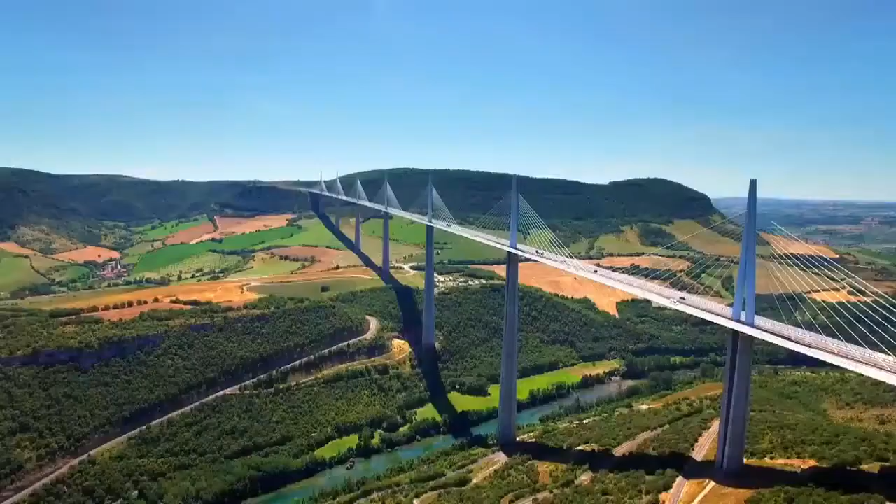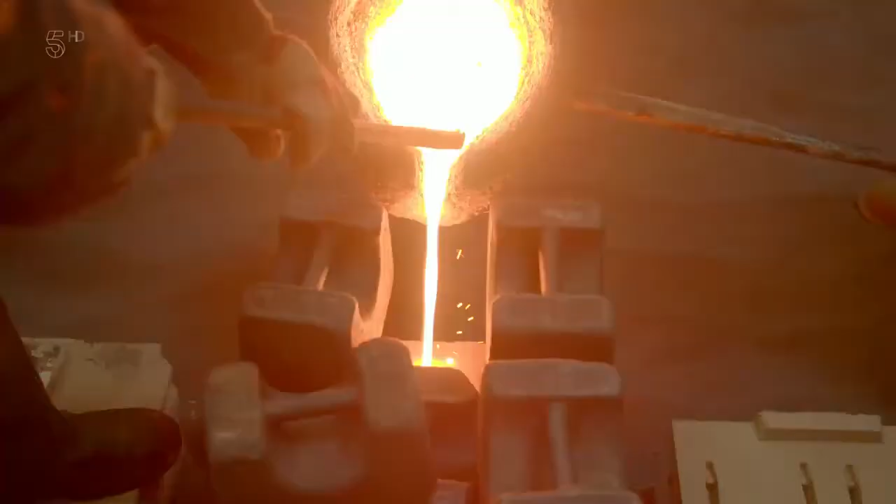Majestic, dramatic, awe-inspiring. These are the bridges that are worldwide icons, as well as engineering marvels. Each of them broke new ground - the first, the biggest, the longest, and the tallest. I'm Rob Bell, an engineer, and I'm on a global adventure to discover how and why these magnificent structures were built, and to learn about the sweat and the sacrifice that went into their construction.

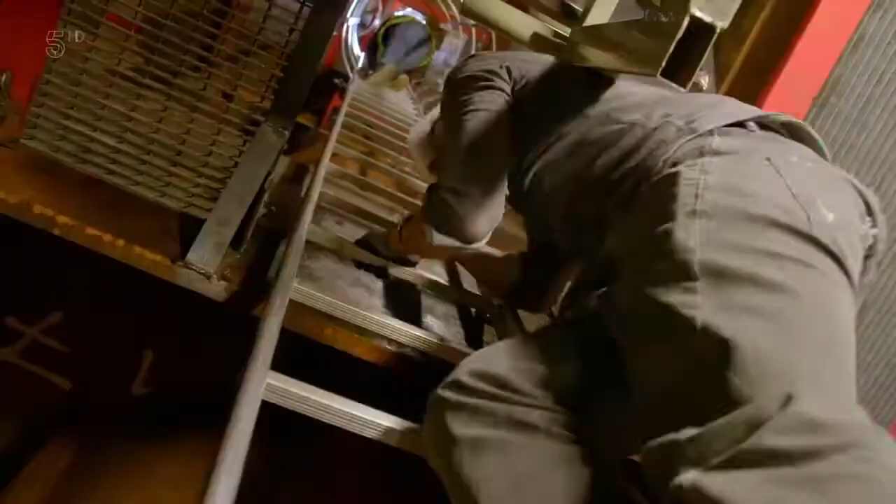I'm going to take you closer than ever before, inspect them from every conceivable angle, and meet the men and women who keep them working round the clock, no matter what. These are the world's greatest bridges.

Sydney, Australia's oldest and largest city, and one of the world's most beautiful waterfronts. It's known as the Harbour City, and the very best way to arrive here has to be by boat, just as the first European settlers did some 230 years ago. Sail into the harbour and you'll pass two world-renowned structures, the Sydney Opera House and the Sydney Harbour Bridge.

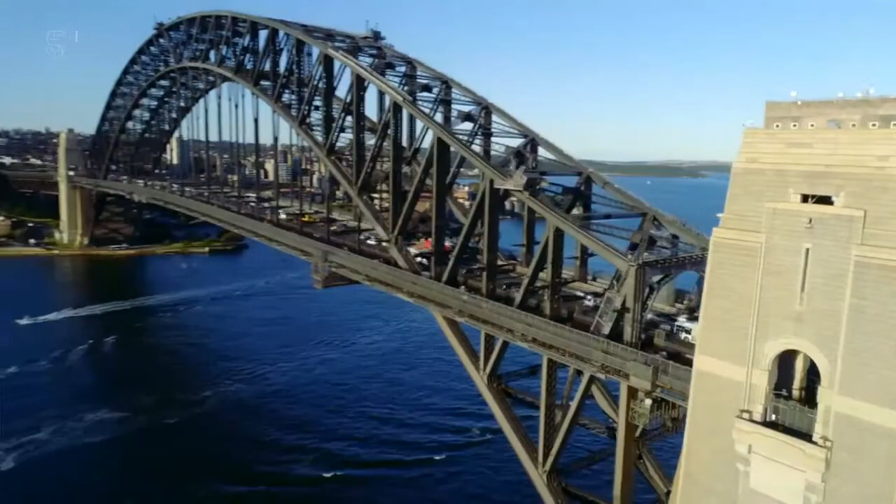Rising to a height of 440 feet, it's the world's tallest steel arch bridge, connecting the northern suburbs of Sydney with the city centre. It weighs more than 39,000 tonnes, spans 1,650 feet and is 160 feet wide. It carries 8 lanes of traffic, 2 railway lines, a footpath and a dedicated cycle path. Every day, more than 200,000 cars travel across it.

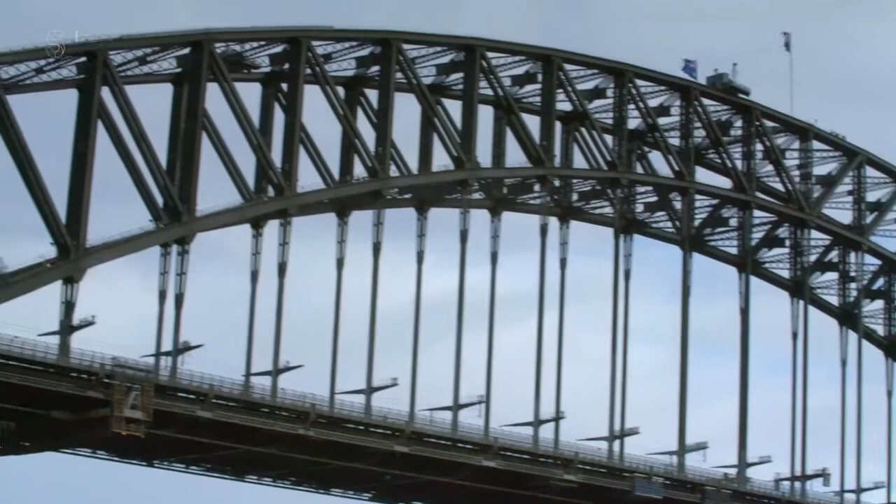When it opened on the 19th of March 1932, it instantly became a world-renowned landmark. And since then, millions have passed across it, over it, and under it. Like a giant, triumphant gateway, it signals your arrival here into Australia. The bridge had taken a century from first proposal to completion. The construction itself lasted 8 years and cost £6 million. And its arrival marked a new stage in this young city's remarkable evolution.

Sydney was founded in 1788 when 11 British ships landed, right about here. On board were more than 1,000 settlers, including some 850 convicts. The captain described this as, without exception, the finest harbour in the world. And he named it Port Jackson.

Within 4 years of the first shipload, another 4,000 convicts arrived. They were followed by the first free settlers from Britain, who travelled here to make a new life. By 1871, 200,000 people called it home.

As the south side of the harbour became crowded, some began settling directly opposite. The North Shore's so close, look - you could swim to it. Yet to get there by land, you'd have to travel a good 15 miles all the way round. And in the 19th century, that journey would have taken about a day. The alternative was a ferry.

The first service was started in 1816 by an enterprising ex-convict from Jamaica. Billy Blue, as he was known, plied his trade wearing an old naval officer's coat. Demand was such that he soon had a fleet of 11 boats.

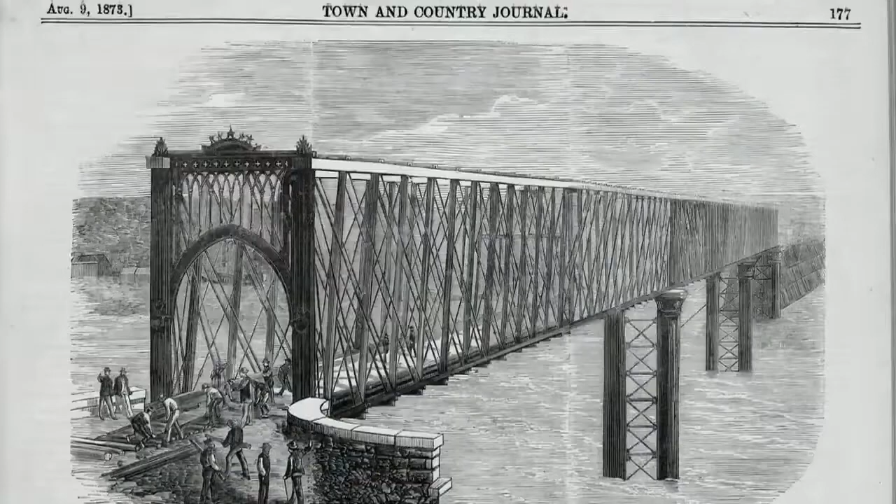In fact, this wasn't a new idea. Throughout the 19th century, various bridge proposals had been submitted, but had all been rejected by successive governments. The designs were considered too fantastical, too unsightly, too much of a risk to shipping, or simply too expensive. But by 1900, a solution was needed urgently. So the government launched a worldwide competition to find the best design and construction plan.

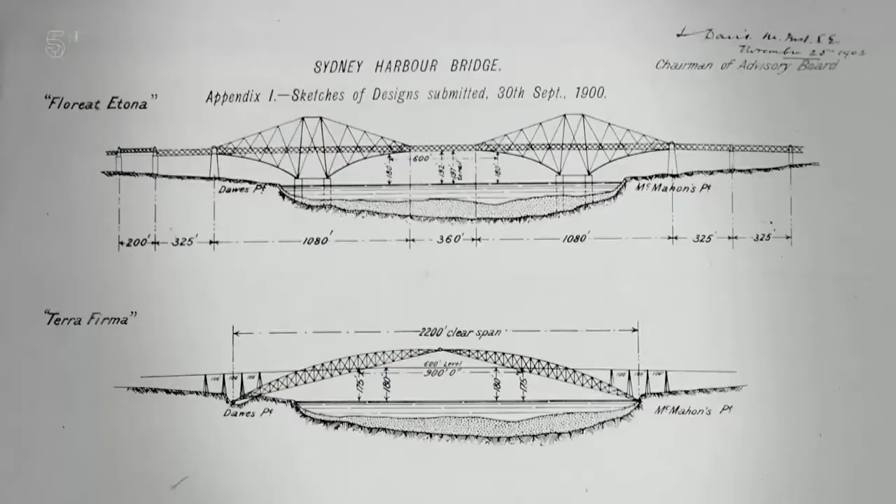30 of the top entries were put on public display here at the Queen Victoria Building, once a market, but now a smart and chic mall. But the judges deemed them all to be unsatisfactory and too lacking in detail. The only answer? A second competition, this time with a much more detailed brief.

The bridge had to allow a clearance of 170 feet above the water. The main span needed to be 1,192 feet long, and the deck a minimum of 60 feet wide. It also needed to accommodate 2 railways, 2 roadways, 2 tram tracks, and 2 footpaths.

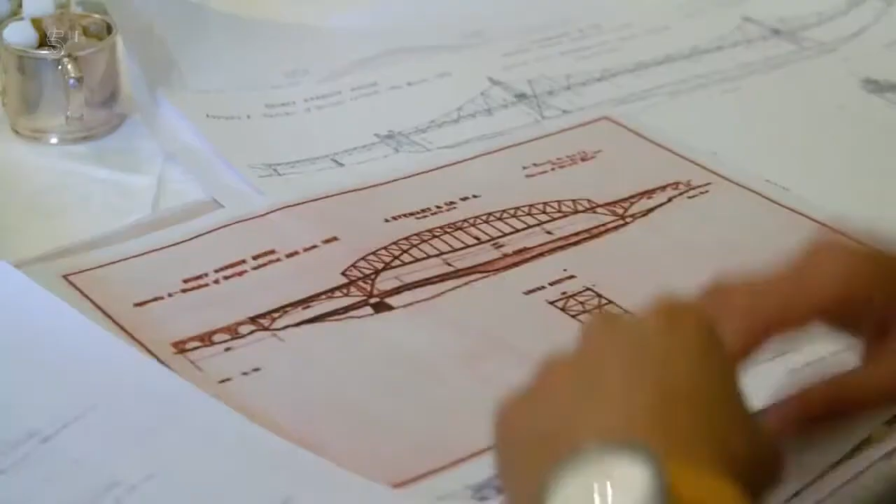It was this submission from Norman Selfe that won in the end - a cantilever bridge, a design where the beams are anchored at just one end and supported by large towers. The judges advised the government that construction should start immediately and be completed within 5.5 years. But then a change of government brought the entire project to a grinding halt before it even got started.

The designers were furious. Over a period of 3 years, they'd invested a huge amount of time and money into what they described as the Sydney Bridge guessing competition, and all for nothing. And much to the anger of the people, it was looking like Sydney Harbour would never get its bridge.

The Sydney Harbour Bridge, once the highest man-made structure in Australia and still the most famous.

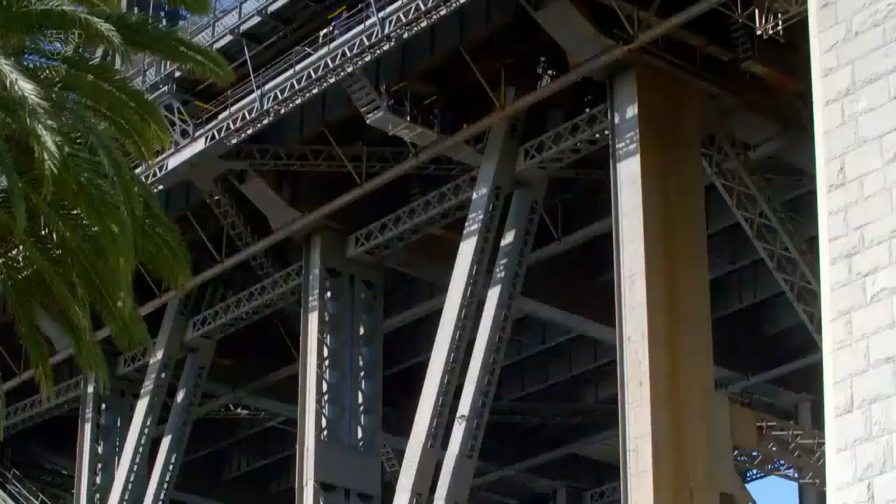Walking across, you get a real appreciation of the scale of what's here. But it's not just the size, it's solidly built too, and you get a real sense of that looking up - the width of the steel plates that make up the arches, all the truss work between the arches.

Not to mention the imposing granite-faced pylons at each end. It's seriously impressive. But at the beginning of the 20th century, it seemed unlikely this magnificent bridge was ever going to be built, as the project was hit by one delay after another. Norman Selfe's design, now more than 10 years old, was outdated, and following his death in 1911, the doors were left wide open for a new generation of bridge designers.

The bridge we see and admire today might not have existed if it weren't for the drive and determination of one man, John Job Crew Bradfield. And even if it had gone ahead without his involvement, it would certainly have looked very different.

Bradfield began his career as a draftsman. In 1891, he joined the New South Wales Public Works Department and went to live on Sydney's North Shore. That meant travelling to work by ferry, so he understood commuters' demands for a bridge all too well. As an advising engineer on the abortive bridge design competition, he'd witnessed what a farce it had been. But in 1912, when the government took another look at building a bridge, he was determined to make it happen.

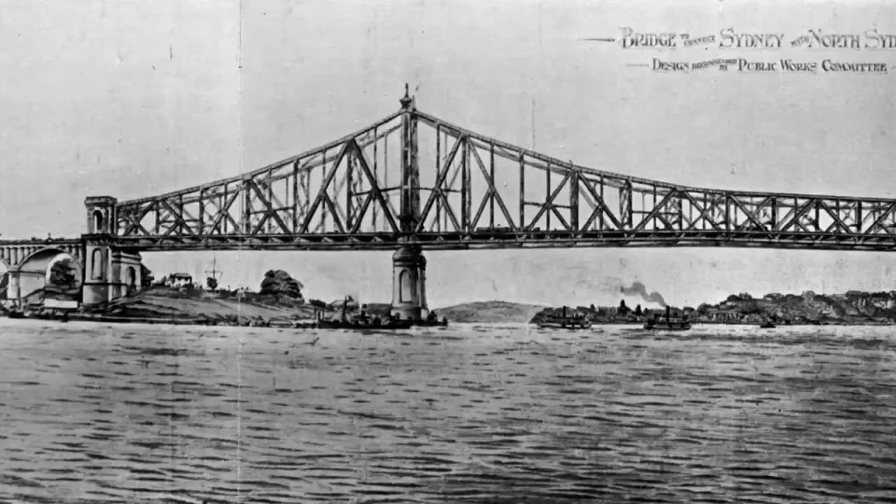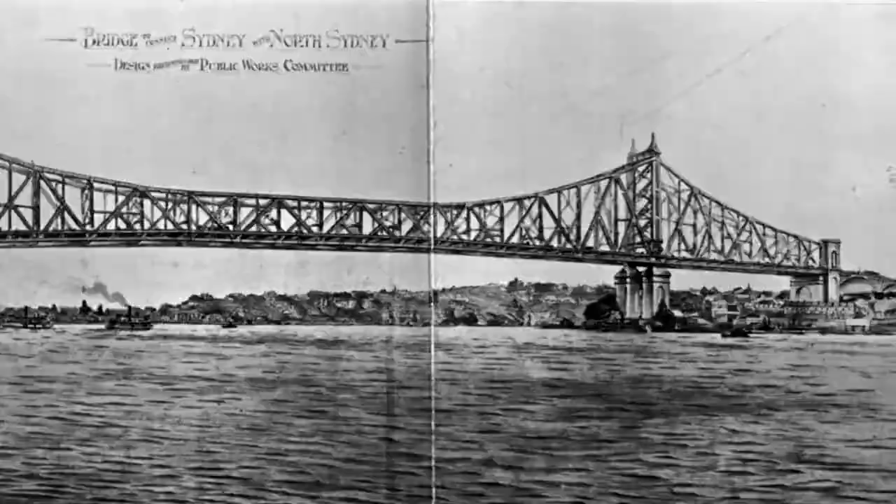After being appointed chief engineer of the Harbour Bridge and Metropolitan Railway construction, Bradfield submitted 2 designs himself. In 1913, one of these was accepted. It was a cantilever bridge, with each span built out sideways from huge piers. Steel trusses were to be used to give it strength and rigidity. Connecting Dawes Point on the south shore to Milsons Point on the north, it would carry 4 lines of railway, 2 roadways, and a footpath.

Although still a cantilever design, it was far more ambitious than any past submission. The budget was agreed, the design was agreed, and the time frame was agreed. But then the First World War broke out. The money for the project was diverted to the war effort, and once again, the bridge was cancelled.

It was to take a further 8 years before the state government were once again in a position to consider Bradfield's proposal. Luckily for them, Bradfield was a patient and determined man, something his grandson Peter remembers well.

I think he knew how important it was to weld the city together, to get the east and the north and the south and the west together, and the bridge was absolutely essential. He was a visionary in many senses, always extremely meticulous in everything he did. He didn't have a localised view of things, he had a national view of things.

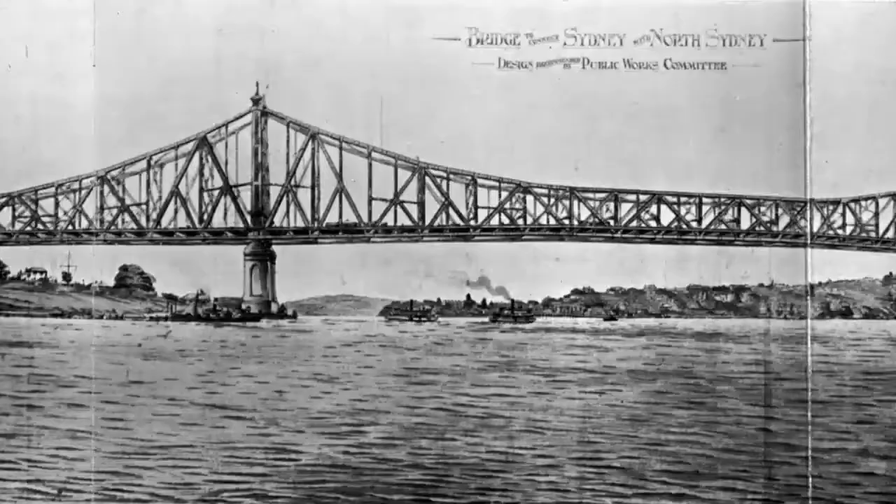So dedicated was Bradfield that he travelled the globe to meet the world's top bridge-building companies, learning all he could about the latest construction technologies and techniques. When he returned home, he was no longer wedded to his cantilever design. Instead, he asked the government to accept submissions for an arched bridge.

The main reason Bradfield changed his mind was a practical one. Arches are naturally incredibly strong, and engineers have been using them since ancient times. And nature's been using them even longer. Take this eggshell, for example, or half an eggshell. The shape of it creates a natural arch, and it's incredible for something so small and so thin how much force it will take before it starts cracking.

Let me show you. There we go. Well, it easily takes the weight of the tray, but let's load it up. Bottle of water here, let's pop that on top. It easily takes the weight of 1 bottle of water. All right, let's try another one. 2 bottles of water, easy peasy. It's the arch that's taking all of that force.

Because I'm trying to compress it, those forces pushing down are taken out through the sides of the arch, or through the structure of the eggshell, and into supports below, or the table in this case. 3rd bottle, let's have a look. 4th bottle, let's see what happens. Taking this up to 2.4, almost 2.5 kilograms of weight now. It's still staying strong. Let's try a 5th bottle, and this is going to take it up to 3 kilos. Will it take it?

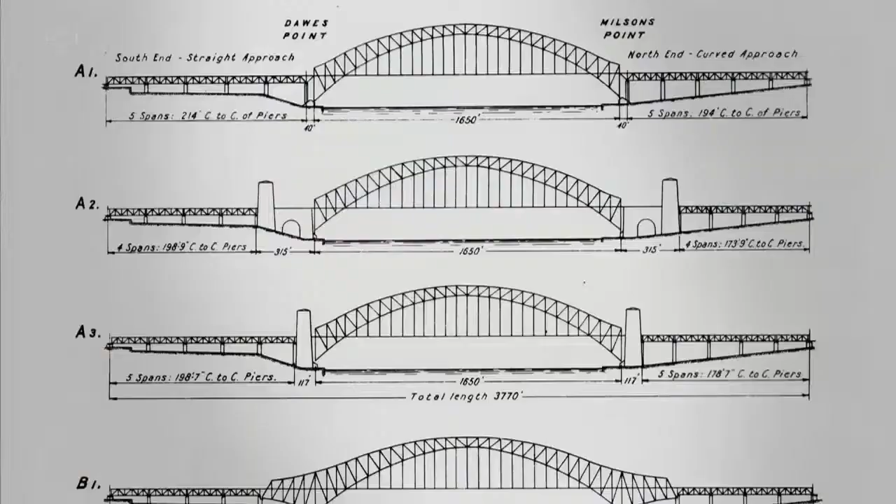Before construction tenders for this new arch design were even accepted, Bradfield began preparing the ground. On the 28th of July, 1923, the turning of the first sod ceremony took place on the North Shore. What should have been a cause for celebration was, for many, a time of great concern, as 500 houses in the immediate area were compulsory purchased and destroyed.

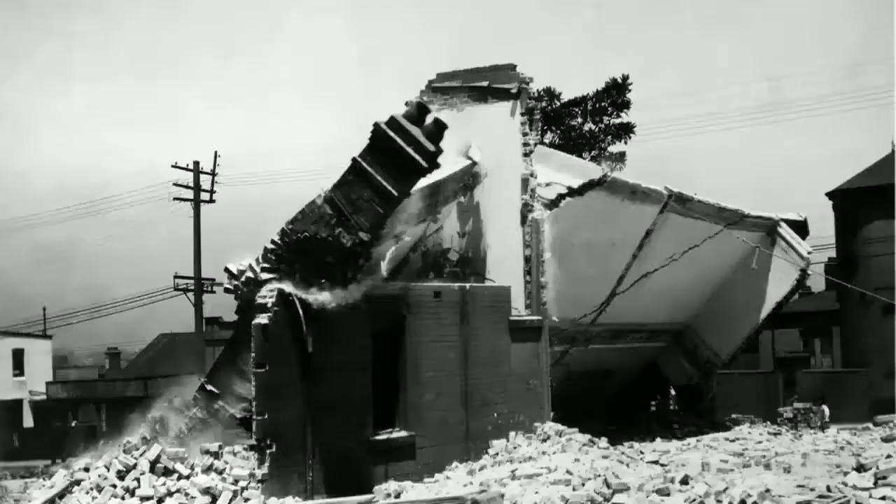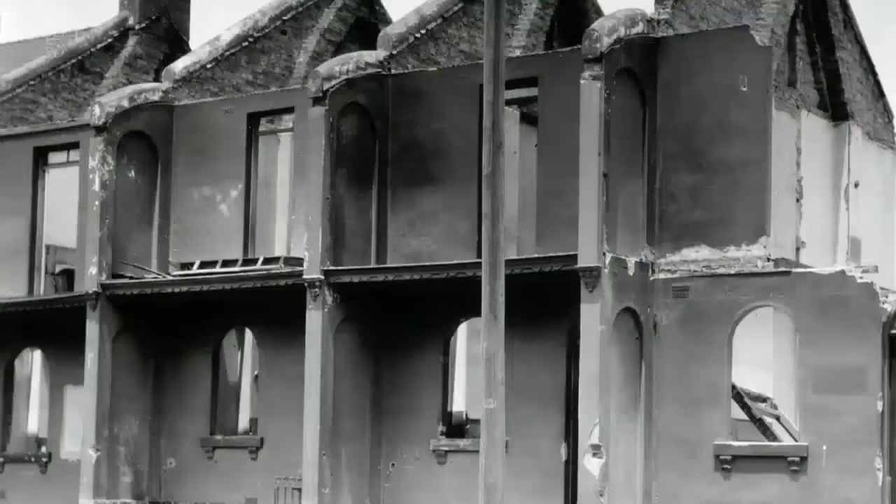Some people wrote letters to the government. This one's from a Mr. Lockhart, an 82-year-old who stood to lose his furniture business. He writes: 'Dear Sir, my wife wrote some weeks ago regarding compensation for loss of home and means of living. In reply, you stated that all the department could grant would be the cost of cartage. The amount is small, but would be very acceptable, as we have no means and are both too old to go out to work.'

Another letter, this one from a Mrs. Pitcairn, a widow whose daughter taught music at home. She writes: 'My one desire is sufficient to get a home again. Indeed, since we lost our home, we've had to sell many things for necessities to keep out of debt.' She goes on: 'Through the bridge, everything is taken from us. At this time, I had only one wish, to take my own life, and only my religion held me back.'

Though some people in the government may have been sympathetic to these pleas, they were afraid of setting an expensive precedent. A blanket policy was laid out: there'd be no compensation.

Over on the south shore, in an area called the Rocks, the residents had even less sway. It was this area where the poorer, less fortunate members of society made their homes, packed with tiny bars, brothels and hovels. The government wasted no time driving these residents from their homes before auctioning them off to building supply merchants who demolished them.

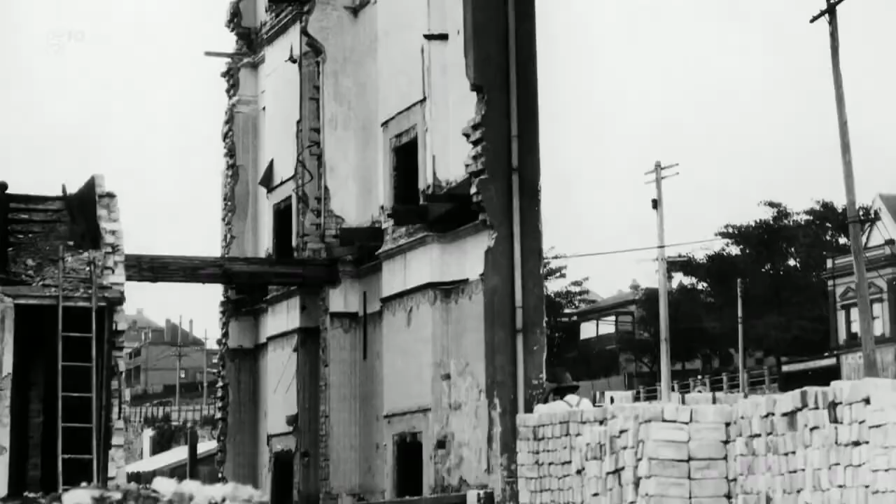When it came to the government's shiny new bridge, it was far more concerned with what it would look like than the effects on the local population. Bradfield had drummed up interest in the project during his round-the-world fact-finding tour, and he'd since received more than 20 designs from companies based in the United States, in Britain, in Canada, as well as here in Australia. On the 24th of March, 1924, he made his decision. He awarded the contract to the English firm Dorman Long and Company and their consultant designer, Sir Ralph Freeman.

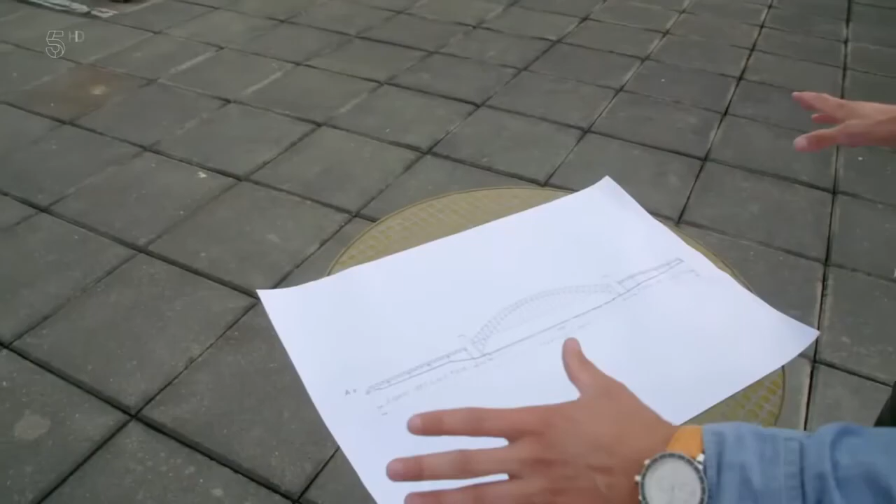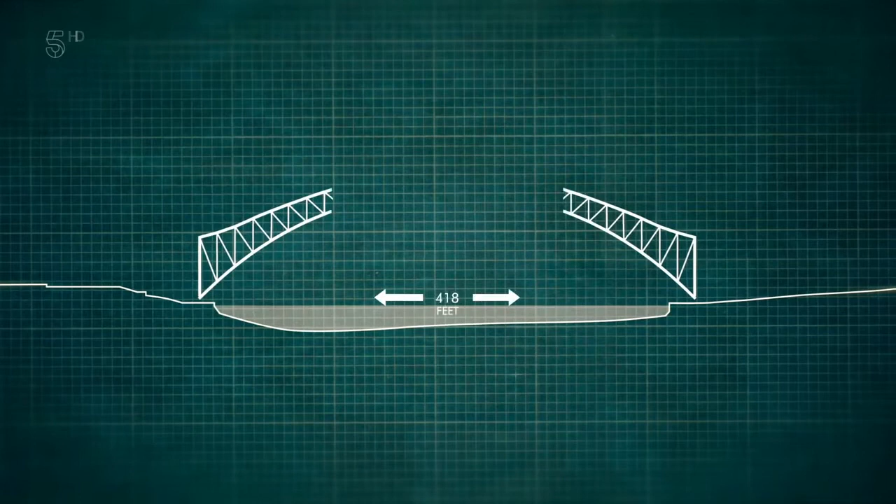Bridge A3, as it was known, would be the largest structure Australia had ever seen. It would be strong and it would look strong. Its granite-faced pylons, according to Bradfield anyway, would give it an air of dignity. The design provided for a single great central arch spanning 1,650 feet, crossing Sydney Harbour from north to south in a single stride, rising at its centre to a height of 440 feet.

From this, the trackway was suspended at an average height of 170 feet above sea level, passing off the arch at either end onto a series of 5 approach spans, formed of horizontal girder structures on granite piers. At 50,000 tons, this would be the world's heaviest structure. The steel sections, and even the rivets holding them together, would be the largest ever produced for a bridge project.

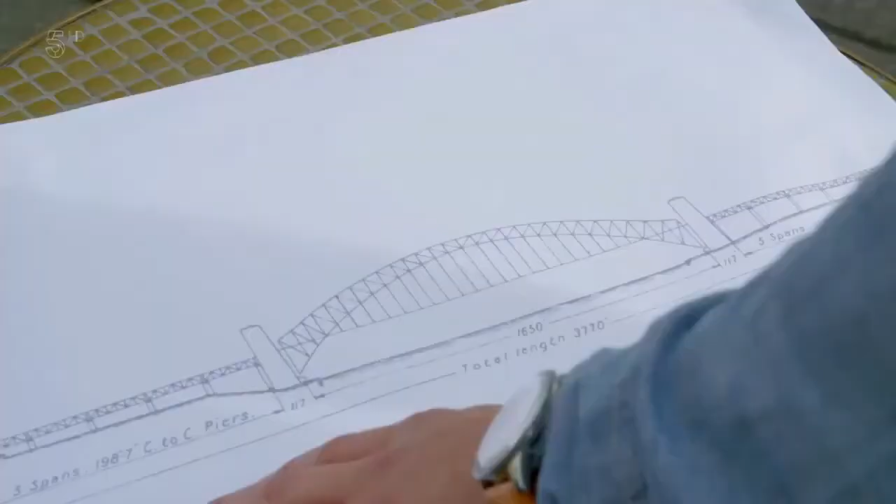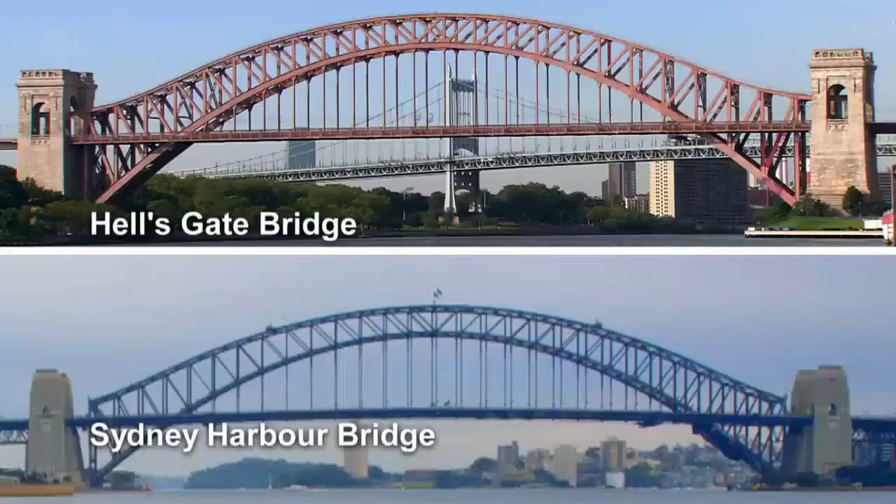20 years earlier, he'd considered an arched bridge to be a bit of an eyesore. But now he was a total convert and had completely ditched his original proposal of the cantilevered bridge. Bradfield had been won over to the steel-arched bridge design after seeing New York's Hell's Gate Bridge. Built in 1916, it was the first steel arch to span 1,000 feet. Although only a fraction the size of the Sydney Harbour Bridge, they bear an uncanny resemblance, even down to the decorative stone pylons.

Bradfield estimated that the steel arch would cost £350,000 less than the cantilever bridge. And with new advances in steel, making it both lighter and stronger, the arch to Bradfield was becoming not just practical, but irresistible.

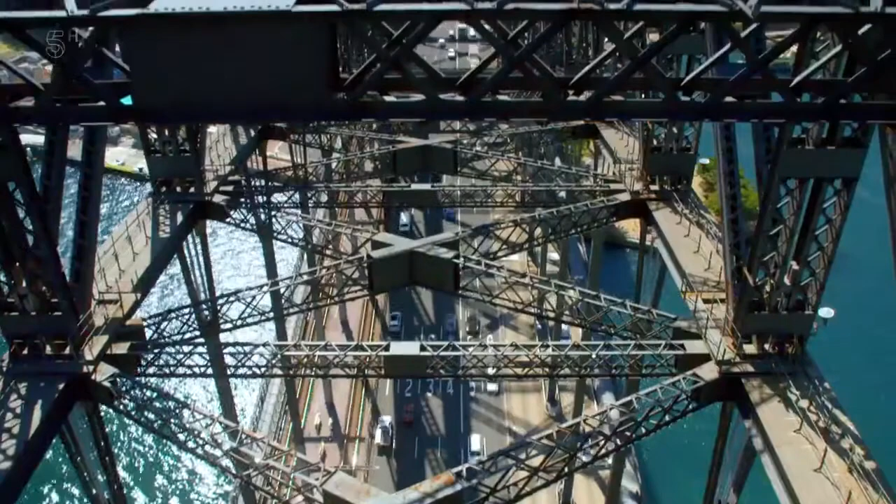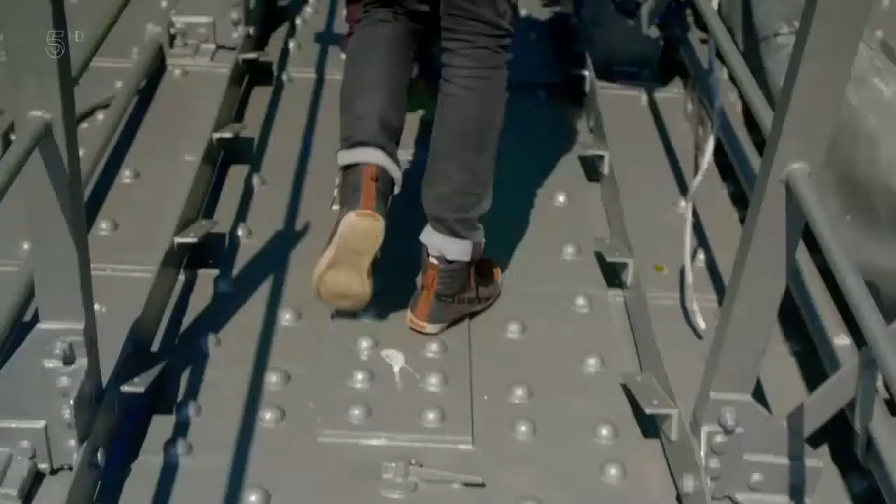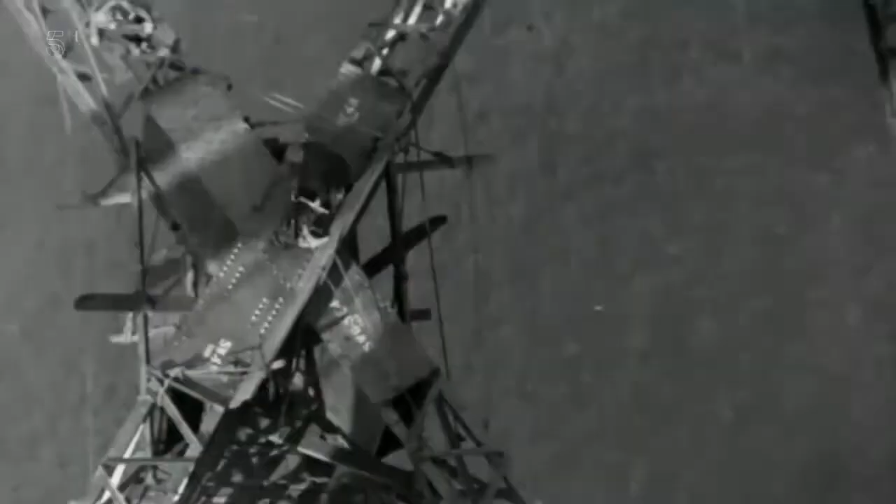Bradfield had approved the design by Dorman Long, and now the responsibility for getting it built largely fell to their English Director of Construction, Lawrence Ennis. During a 43-year career, he'd built bridges all over the world. For this latest project, he moved to Australia, describing it as the most difficult he'd ever encountered. His task was Herculean. It would take 5 years before construction of the giant steel arch even got underway. Before that, there were plans to be drawn up, workshops and machinery to be built, and granite to be quarried. And eventually, once the work began, there would be those that would give their lives for the bridge.

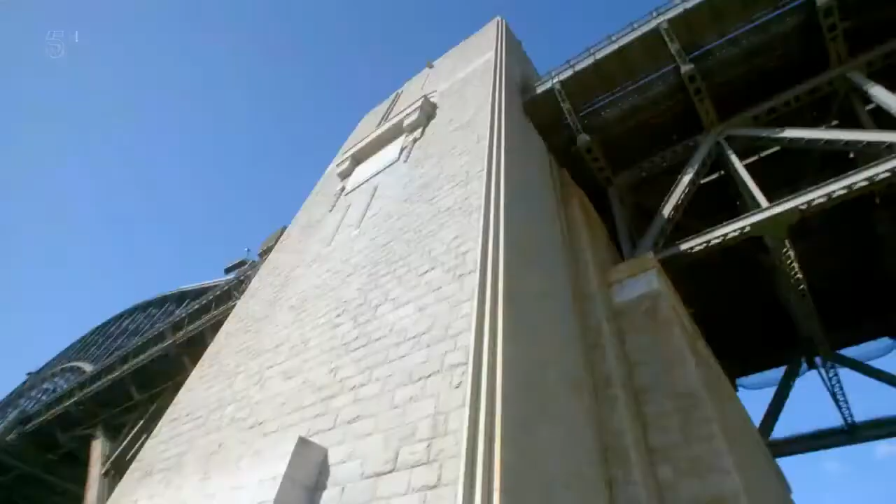290 feet high, they don't actually serve any structural purpose. But Bradfield insisted on them because they made the bridge look reassuringly sturdy.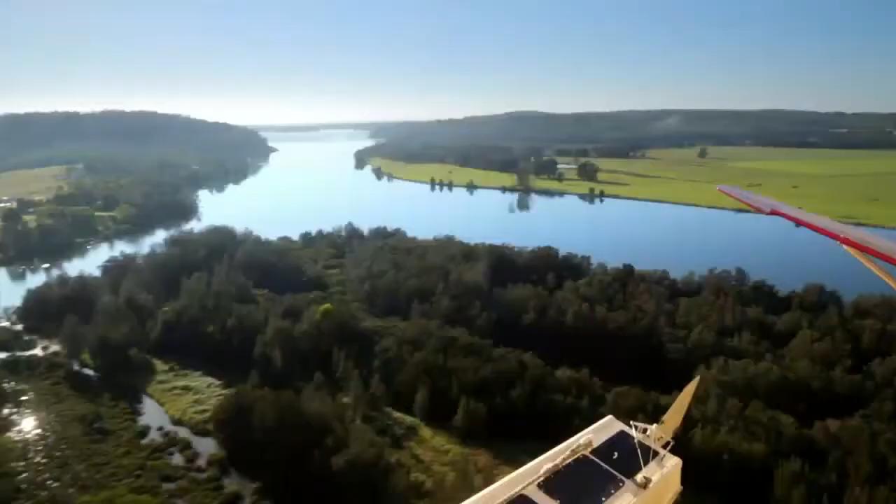The first step was finding a nearby granite quarry accessible from Sydney. And what better way to look at what they found than from the air? The granite itself came from just down there, at a place called Moruya, about 170 miles south of Sydney by sea. It's been quarried here since 1850, and it was described as the best granite outside of Aberdeen.

An incredible 9,000 square kilometres of Australia's southeastern coast is made up of granite. So why did they choose Moruya above all the other sites? Well, the answer was quantity, quality, and ease of access to the Moruya River.

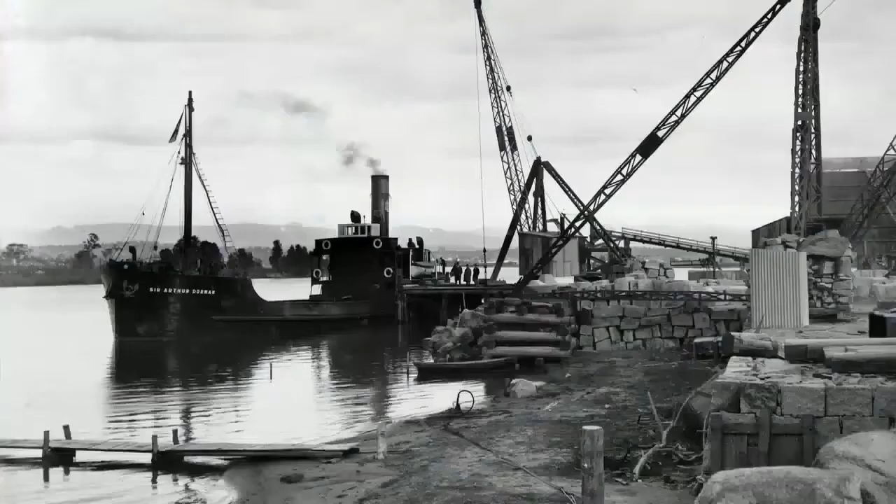3 steamships were built specially to transport the rock down the river and then across the sea to Sydney. But first, it had to be mined. At the time, Moruya was a tiny community, and they didn't have the necessary skilled manpower. So Dorman Long went on a recruitment drive.

John Gilmore was one of the workers they signed up. In 1924, he, along with his wife Mary and their 9 children, moved from Scotland out to Moruya. The work was hard and the hours long, but soon a bustling community was established next to the quarry in an area that became known as Granite Town.

In its height then, roughly how many people would have been living here in Granite Town? Over 300. At the height of the works too, there were 64 children at the school.

So paint a picture for me then. What would we have seen here in Granite Town if we'd have been here back then? There were 72 cottages made of timber. There were bachelors' quarters for the single men. There was a post office, a cooperative store, a school and a hall.

So this became its own community then, did it? Yes. They would enjoy social activities in the hall. Practically every Saturday night it was the place to be. They'd have concerts. The Italians had a band, and the Scottish enjoyed the dancing.

And then the quarry itself was quite nearby, was it? Yes, just over there, just over that hill. It's really close by. When they would blast the rock away from the quarry face, there are memoirs of people recording things falling off shelves. Really? Because of the vibrations? Yes.

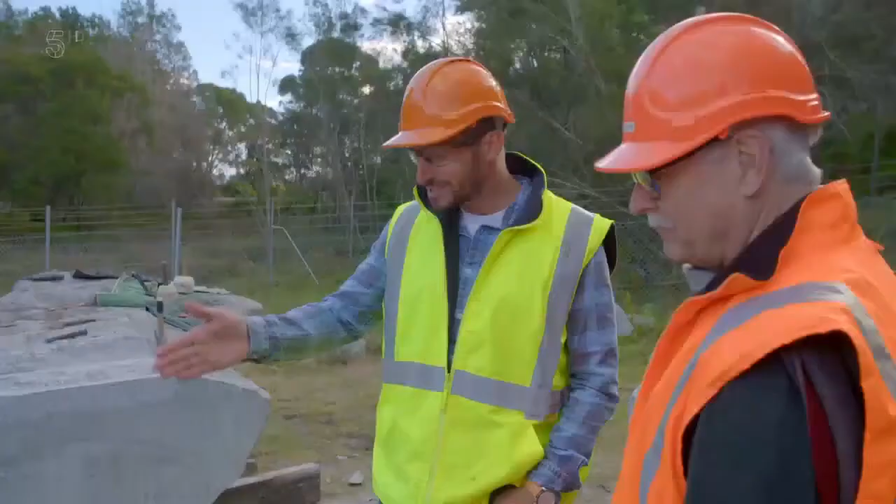What were the techniques those quarrymen were using to get the granite so beautifully and so pristine for the Sydney Harbour Bridge? Once they'd produced that large block from the quarry face, then they moved it out as far as they could, and then started cutting it up into smaller blocks using feathers and wedges.

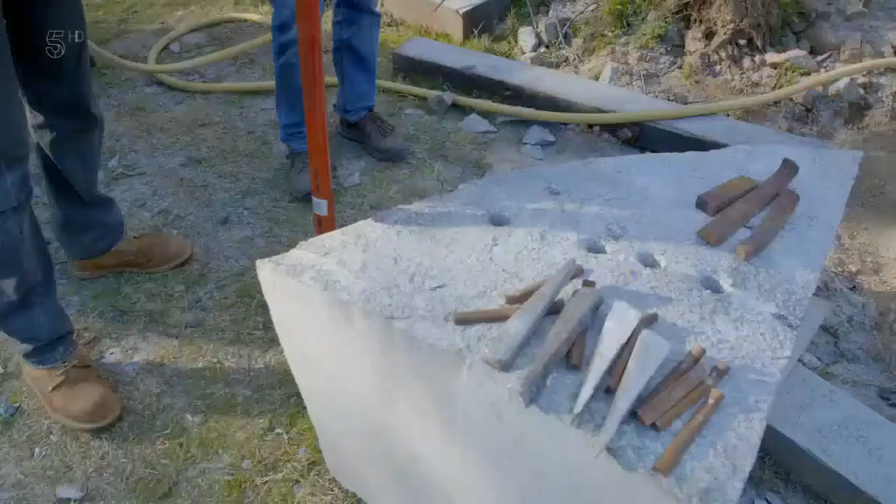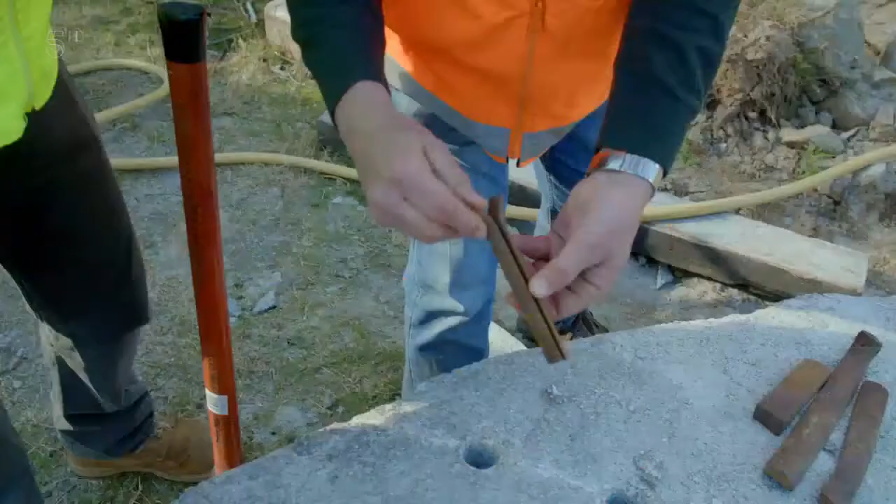We've got a bit of a demonstration set up for you on a smaller section of stone. Holes would have been drilled in the line where you wanted to cause the split, and the feathers and wedges, or feathers and plugs, they go into the hole. And a wedge would fit between them.

So the idea was, the feathers here, they sit down into the rock, down in the hole that you've drilled, and then as you drive the wedge through, you can see what happens: the feathers get separated, and ideally that's separating the rock on each side of it. That's right, the feathers and wedge are designed so there's equal pressure on both sides.

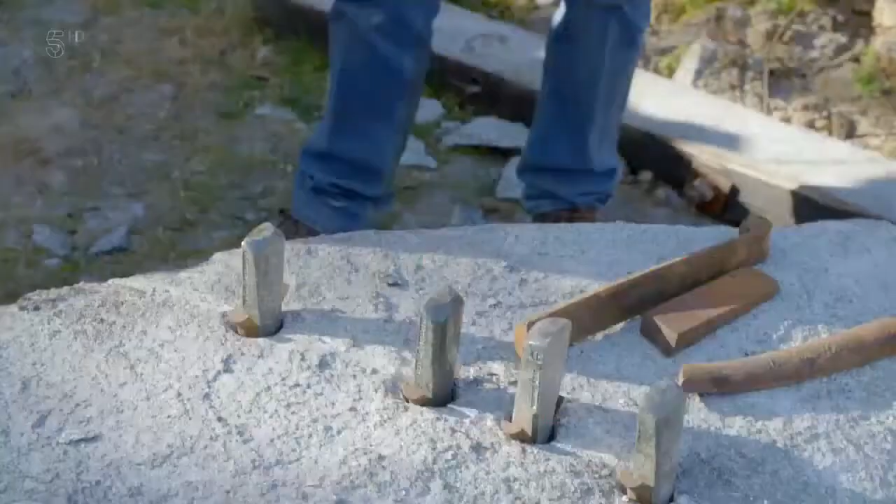So we've got our feathers and wedges all nicely lined up here along the line we want to split the rock. Is it brute force now? Yeah, it's brute force now. Just remember a few taps on each one, about the same strength, go along to each one and then come back again, and keep doing that process until it splits.

I'm actually quite excited to get involved and see if I can split this enormous chunk of granite with just what is a relatively small tool in my hands here, but done the right way, fingers crossed. Right, let's give it a shot.

That's not too hard? No, that's OK, good. So, yeah, this feels like it is quite a nice, delicate process, actually. So now I come back through? Yes.

Well, hey! Is that gone all the way through? Yes, it's definitely started. Let's have a look. Yeah, this dude's talking to me. Yes. Whoa, look at that.

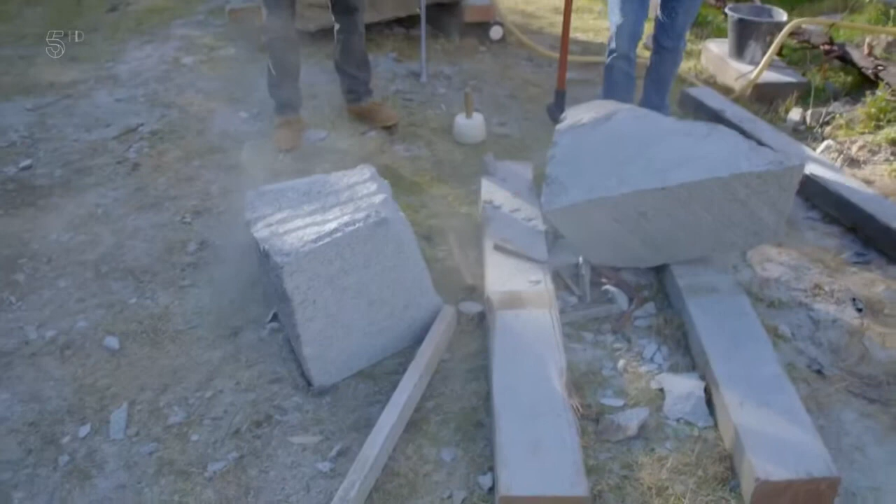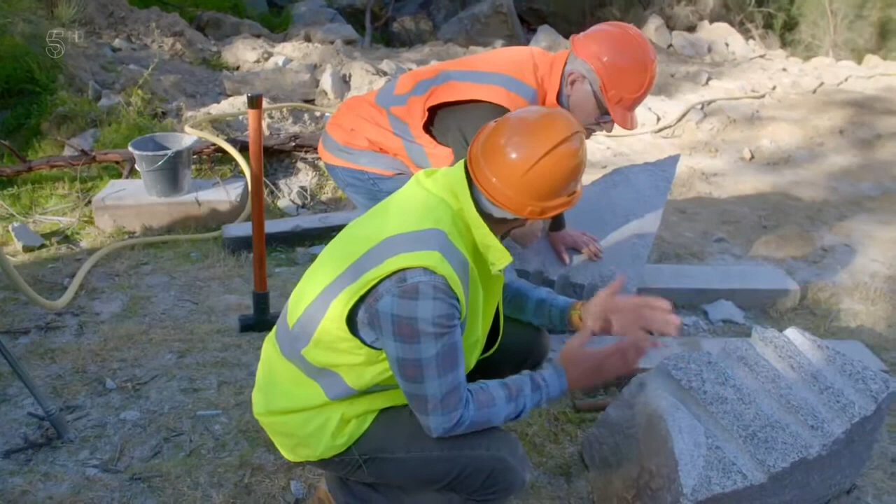Look at that, and look at this beautiful, clean granite. That's the finish that I imagine Bradfield looked at and said, yeah, that's the finish I want to see on that pylon. It wouldn't have needed much more work than that on a nice, clean split. Yeah, if you can get it exactly right for all the bridge work. That is stunning, though. I'm so pleased with that.

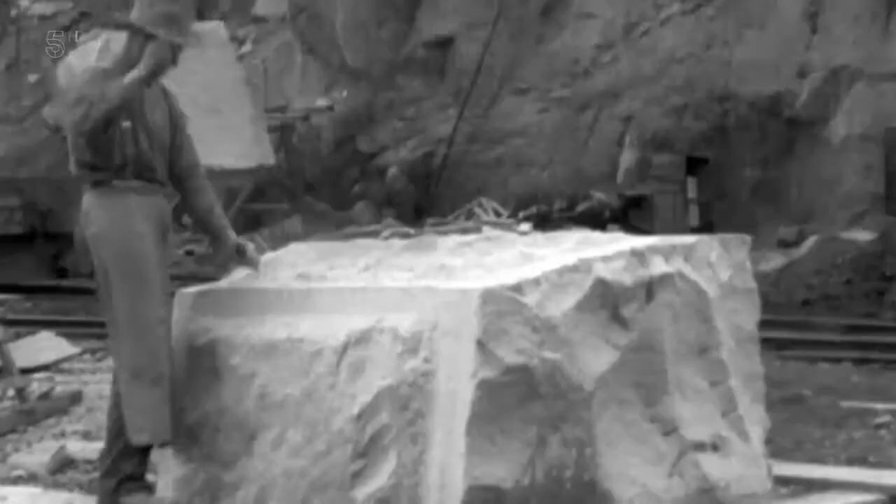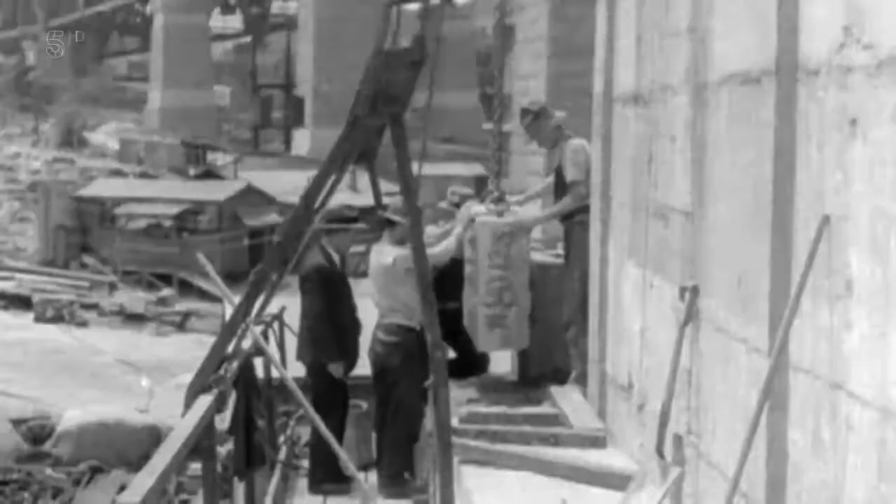Over 7 years, a total of 173,000 blocks of stone were produced this way, each hewn, cut, dressed, and arranged into position like a giant jigsaw puzzle before their shipment. The quarry also provided the bridge builders with a further 18,000 metres of finished stone and 200,000 yards of crushed stone for use in the concrete foundations.

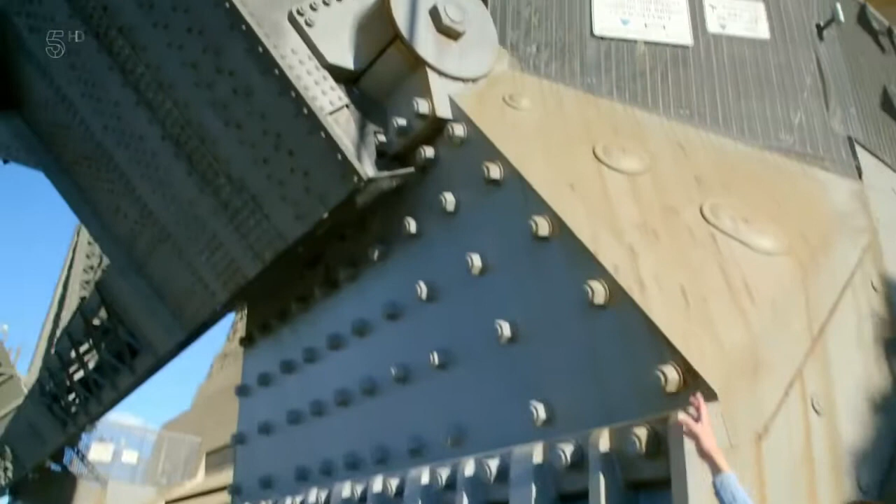Foundations on which the bridge could finally take shape. Now the bridge starts and finishes, rises and falls here from this super-sized hinge. There are 4 of these in total, 2 on this side and another 2 on the other side. You need the flexibility of these hinges. You couldn't have it locked down into the concrete foundation, not just because of the phenomenal winds that blow through here, but also because of the way the steel expands and contracts in the Australian sun.

On a really hot day here, the arch can rise an incredible 18 centimetres. Without these hinges, there'd be too much stress on the steel, causing it to bend, buckle, and eventually fail. As well as expansion, a steel bridge of this size exerts a weight of around 20,000 tonnes on each hinge. So the hinges had to be built on top of huge angled foundations.

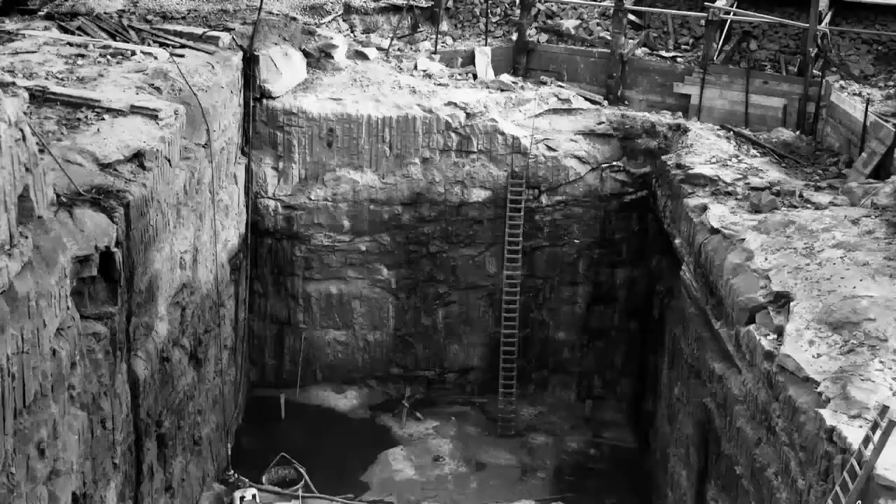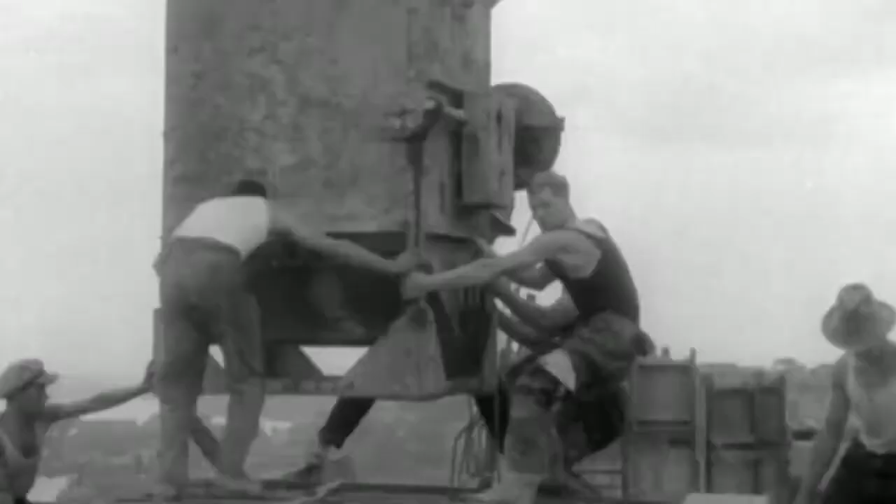Work on these foundations began in 1926. Four large holes, 39 feet deep, were dug and then filled with a special concrete mix. In order to bear the enormous load of the bridge without cracking, the concrete had to be laid in one continuous 14-hour pour. Once the foundations and hinges were in place, work could begin on these, the towers or pylons,

each of them encased in the granite from Moruya. Only then could they finally begin construction of the arch across the harbour. And not before time - by 1928, this stretch of water was dangerously crowded. A few months earlier, a ferry full of schoolchildren collided with a steamship. It sank immediately and 40 people drowned. For the people of Sydney, the bridge couldn't come soon enough.

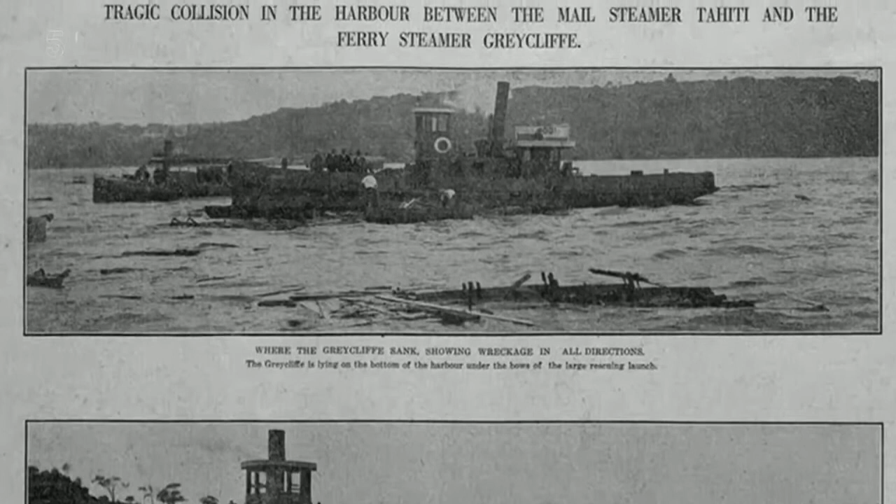But there were still big challenges ahead, not least how to support the arch as it was built across the deep waters of the harbour. The task fell to Dorman Long's consultant designer, Ralph Freeman, a long-standing expert in this field.

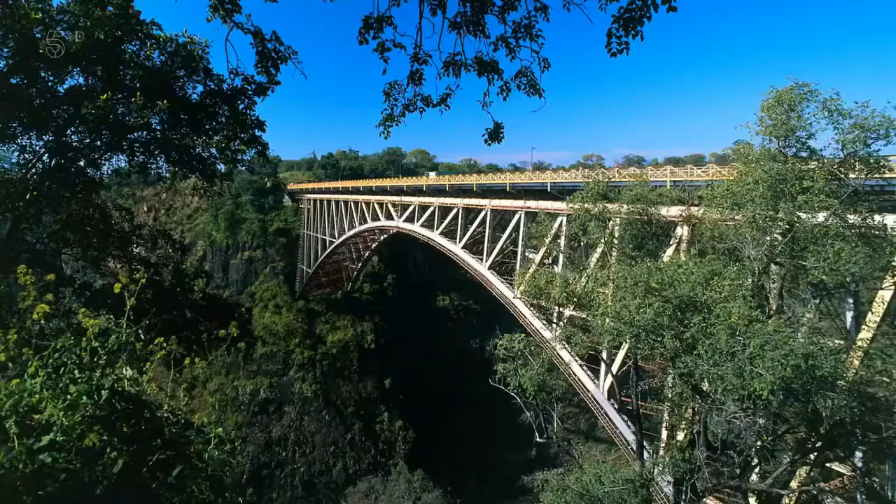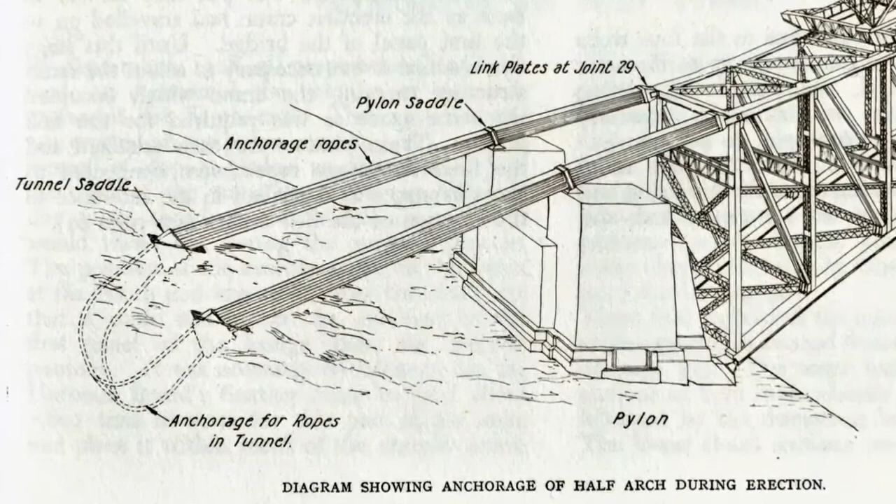Until the 2 ends of the arch, built from the north and south shores, had extended enough to meet in the middle, Freeman needed a way to support the weight of all that steel sticking out from the land. The answer came from the famous Zambezi River arched bridge beneath Victoria Falls, which Freeman helped build in 1905. In order for the arch to be built across the deep ravine, Freeman devised a system using thick steel cables anchored in place to hold the arch up on both sides whilst it was constructed - a method he now intended to use with the Sydney Harbour Bridge.

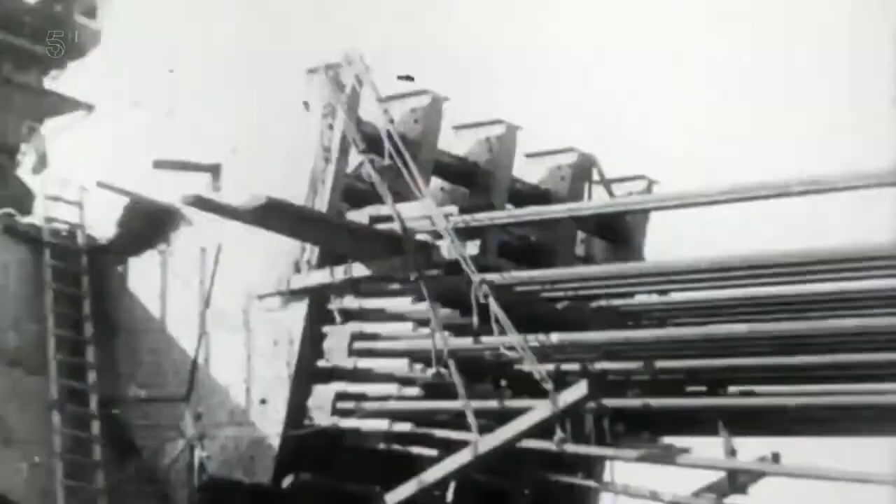The cables ran down through these iron pipes, which are fixed into this concrete saddle, before heading down into a tunnel 40 metres deep and being pinned into the ground. Just as the foundations and hinges are critical today for the bridge to stand up, this saddle, the tunnel, and all 1,600 miles of steel cable were essential during its construction.

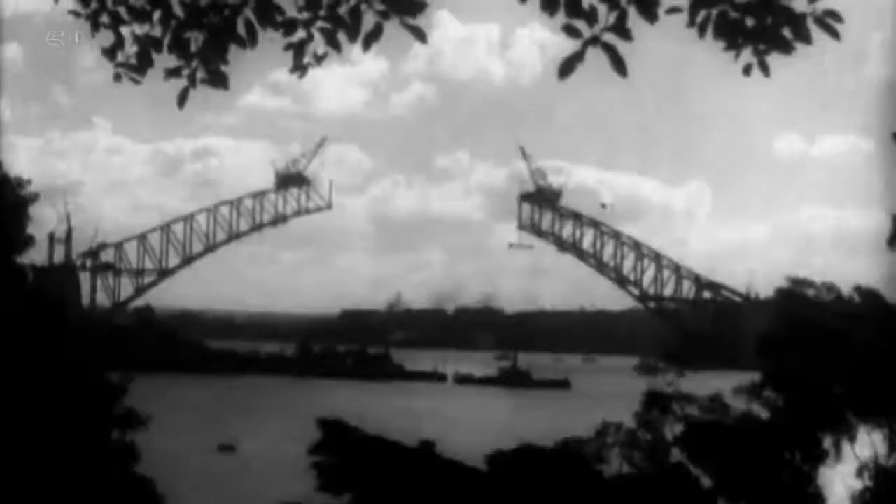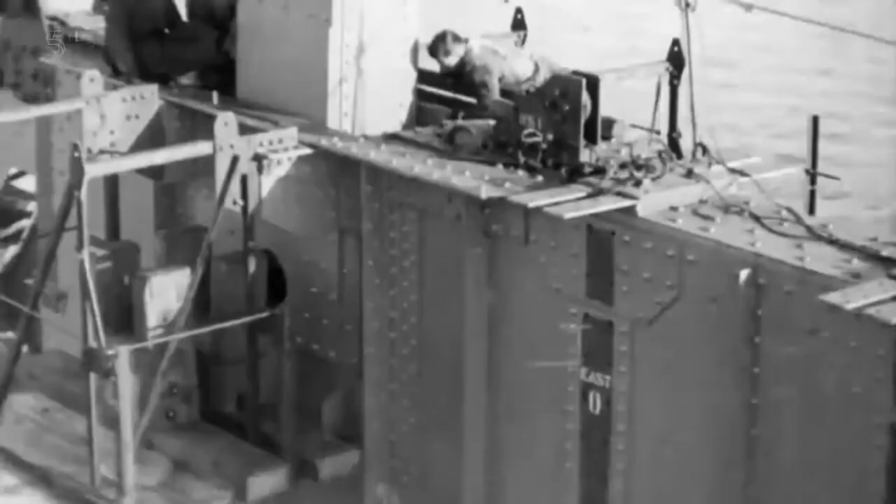Although the 2 sides of the arch were worked on simultaneously, the southern end was built slightly ahead of the northern end to detect any errors and help with alignment. The steel girders were hauled from barges by 2 specially built creeper cranes, each weighing 575 tons. As they put a new panel into place, they crept out onto it to put the next section in.

Assembling the bridge was a mammoth task, involving some 1,400 riveters, boilermakers, steel constructors, and riggers every year. The work was hard and hot. It was also dangerous - there were no handrails or steps like there are today. Instead, men would climb up on the rivets, or use one of these so-called podgers, a kind of pointy-end spanner that they'd jam into the rivet holes and use as hand and footholds, a bit like mountaineers.

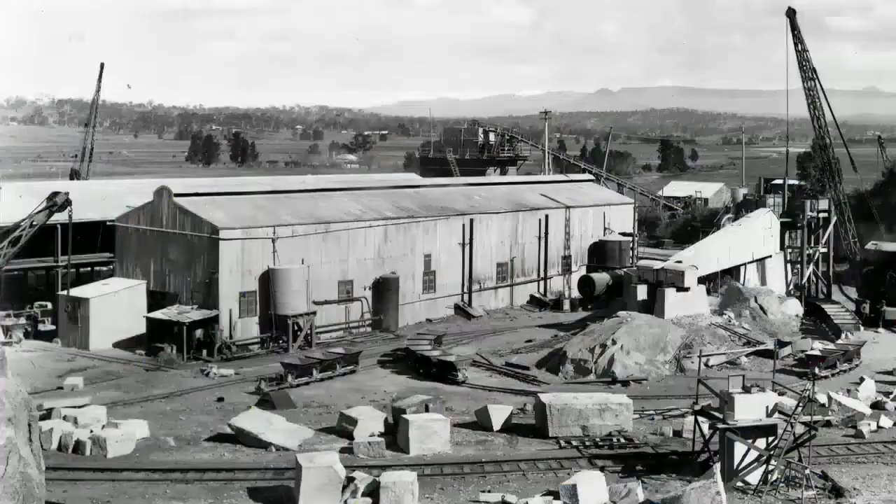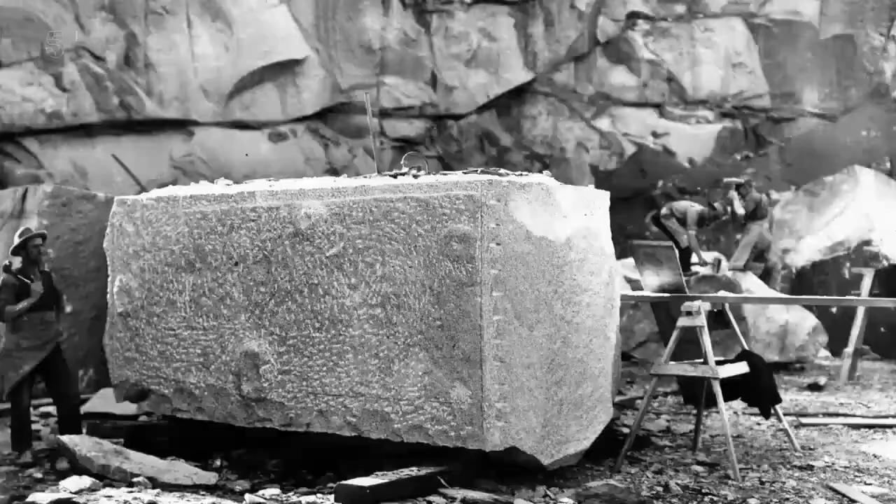But even before the arches had left the ground, 7 men had lost their lives. The first 2 recorded deaths were at the Moruya granite quarry. The earliest was in April 1926 - a man was sitting on the body of a crane when it swung round and severed his leg. The second came less than a year later, when a large block of granite toppled from a ledge, crushing one of the workmen below against the quarry wall, killing him.

In all, 16 men gave their lives building this bridge. Nearly all of them were killed as a result of construction accidents. Only 2 died falling from this steel arch.

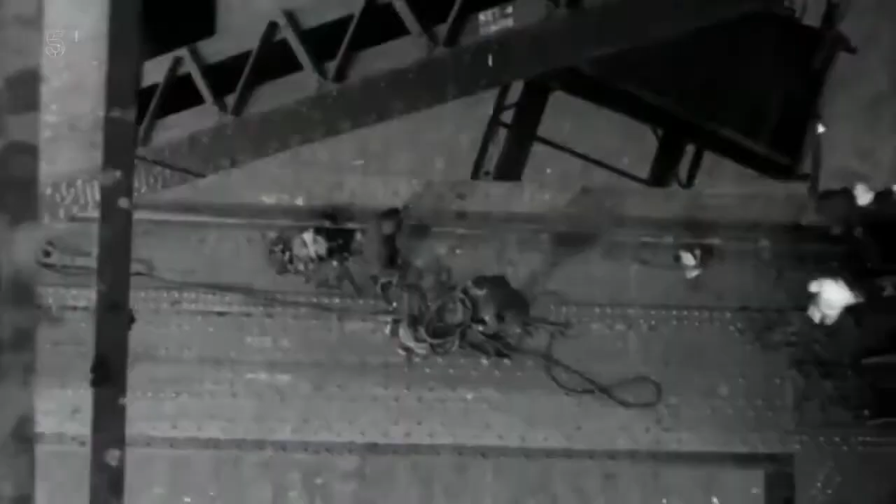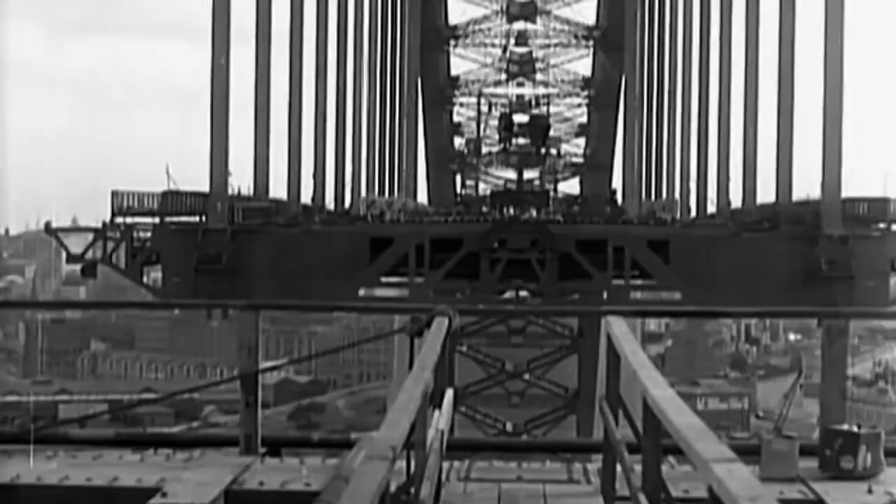But amongst the deaths, there were also some incredibly lucky escapes. The most celebrated involved a riveter named Vince Kelly. Vince was working on the road deck level, about 150 feet above the water, fixing rivets with his powerful pneumatic gun, when he slipped and fell off the platform. As an experienced diver, he instinctively knew his best chance of cheating death was by straightening his body, pointing his toes and raising his arms above his head. By turning himself into a kind of human spear, he'd reduce the impact as he hit the water at more than 80 miles an hour. But still, his chances of survival were less than 1 in 10. Remarkably, Vince's technique worked, and he did survive, breaking 6 ribs but otherwise none the worse when plucked from the river. For his extraordinary feat of survival, he was awarded a special commemorative gold medal.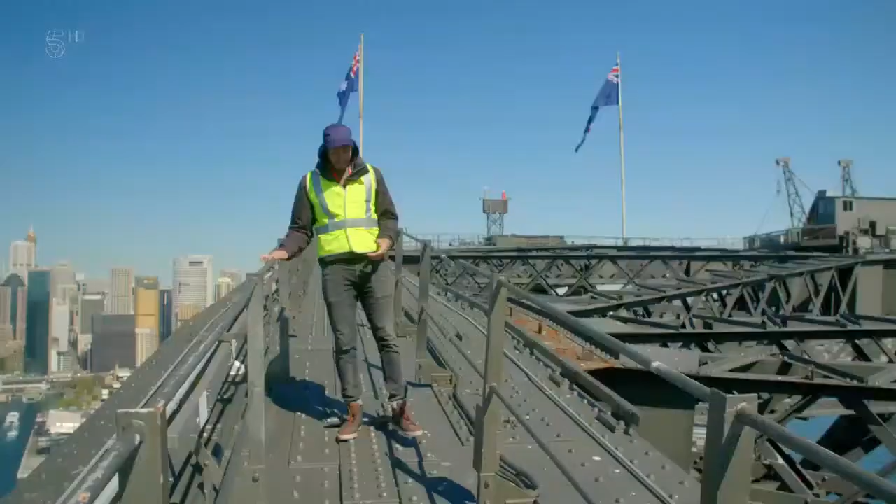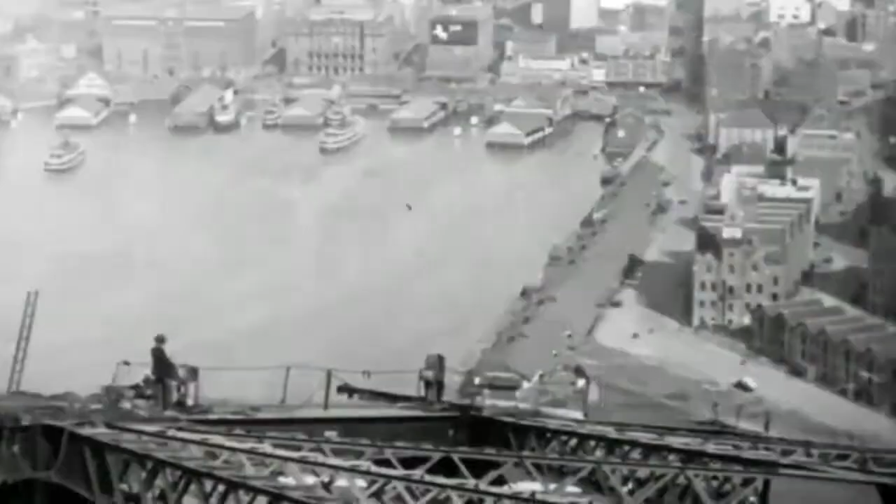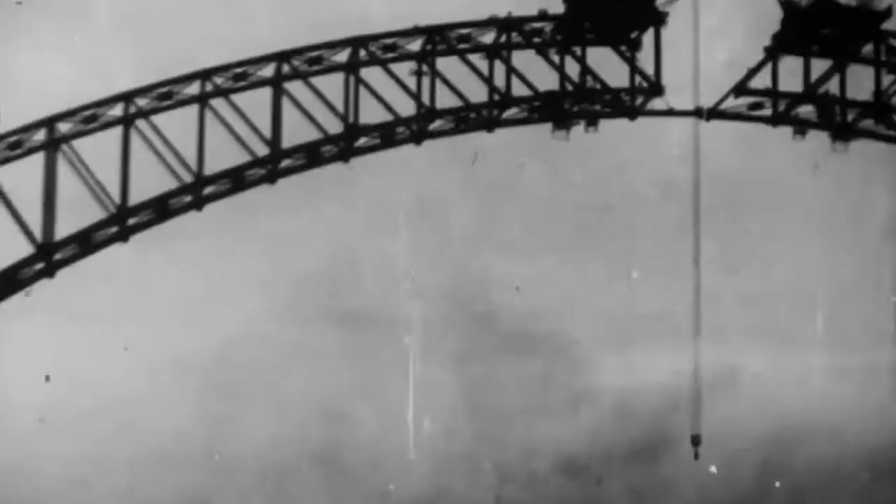Despite the risks, the bridge would become a lifesaver for many others. Before the 1929 Wall Street crash, which sent the world's economy spiralling into depression, unemployment here in Australia was already 10%. Afterwards, it more than doubled. But this construction project continued to provide job opportunities to men who otherwise may have become destitute. It kept on breathing life into the city, so much so it was given the nickname the Iron Lung. As the economy worsened, working hours were cut so more men could be employed. In such desperate times, seeing the arch gradually stretch across the harbour, the two sides getting closer and closer, gave Australians something to be proud of.

Finally, on the 19th of August 1930, the two halves of the arch touched for the first time, right here in the middle of the bridge. It'd only taken two years since the start of construction, but at long last, Sydney North and Sydney South were united.

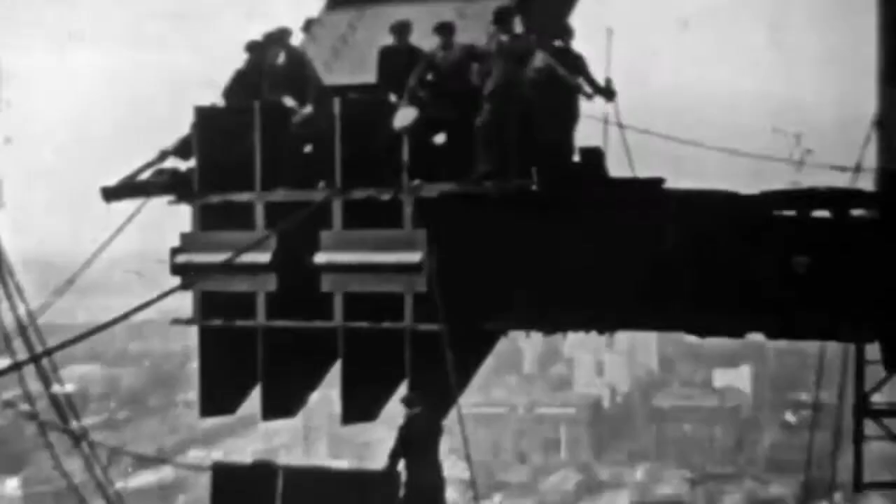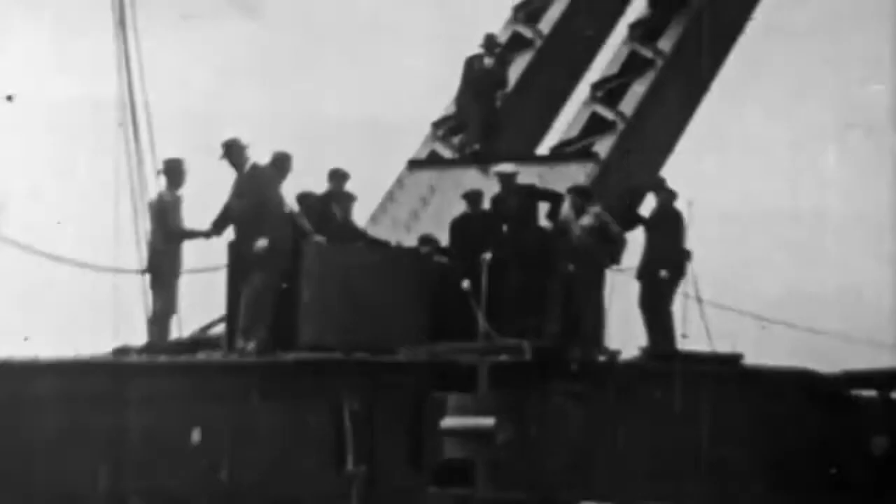Up high on the bridge, Bradfield and Freeman joined Lawrence Ennis, the man who'd overseen the day-to-day management of the construction. It was Ennis who made the first crossing from south to north, along the lower chord of the arch, 400 feet above the water. It would be another two years before the deck was fitted and the bridge declared open to the public.

But in private, a feud was simmering between two of its key players, Bradfield and Freeman, which would soon explode into bitter and open warfare.

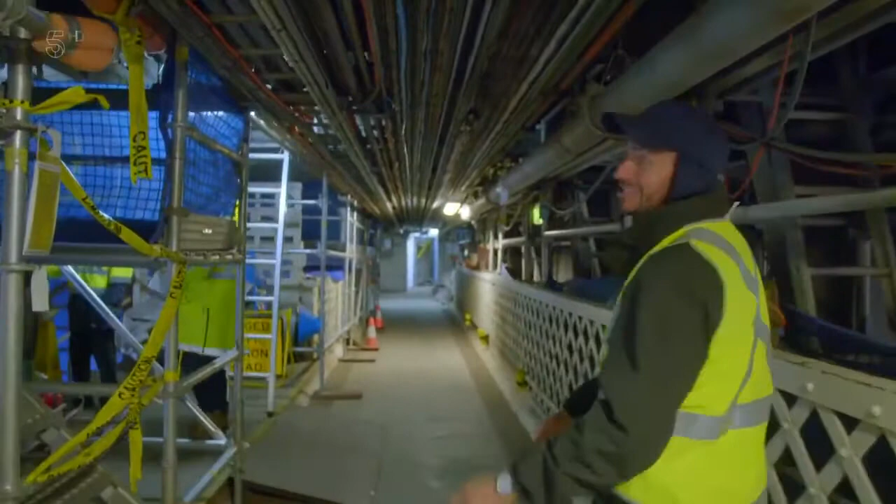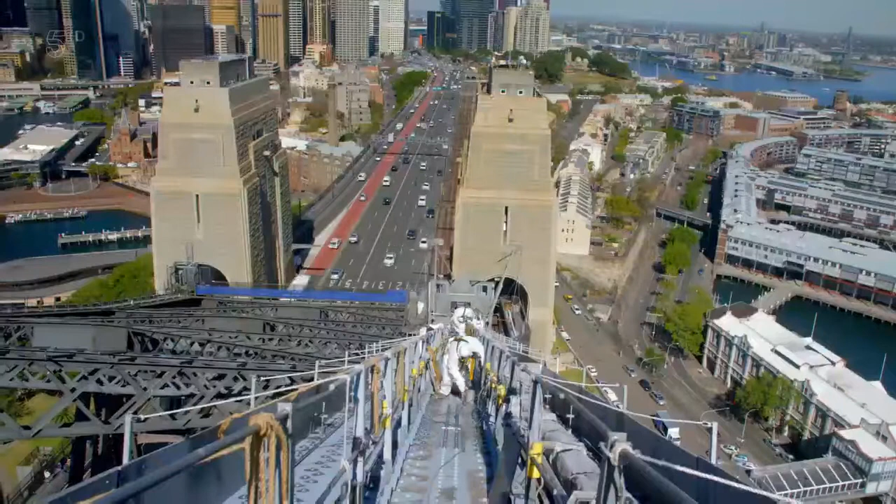Part of the maintenance program includes repainting the exposed steel sections every 5 years. A team of specialist painters used 30,000 litres of bespoke Sydney Harbour Bridge grey paint just to complete one coat. There's, I think, 6 million rivets on this Sydney Harbour Bridge. We've got about 85, 90 maintenance workers, which includes painters, riggers, carpenters, boilermakers, and it's still not enough.

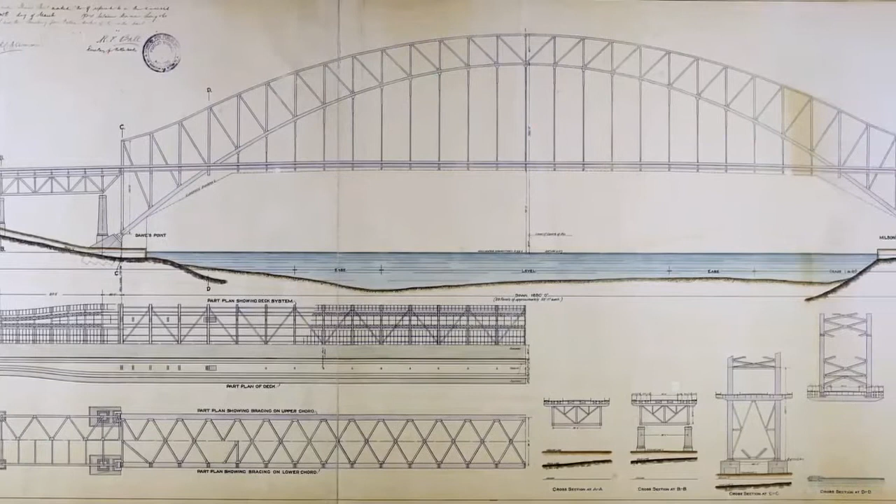Back in the late 1920s, concerns over the bridge's future maintenance couldn't have been further from people's minds, as controversy over who actually designed the bridge was gaining momentum. John Bradfield, the chief engineer, had without doubt been the driving force in getting it built, and it was his proposal that the government had finally accepted. Ralph Freeman, the consultant engineer for Dorman Long, felt he was entitled to at least equal credit. He'd produced all the detailed plans, calculations and drawings, as well as providing the solution for supporting the arch during its construction. But this had all been done under the close scrutiny of Bradfield.

Grandfather spent hundreds and hundreds of hours, with a team of people, checking every calculation that the contractors did and signing off on every calculation that was done for the bridge. The bridge wouldn't be built unless Grandfather had been there from day one, and he was. It was a 30-year project, and the bridge is where it is today, why it's there today, in the form it's there today, because of his overall supervision.

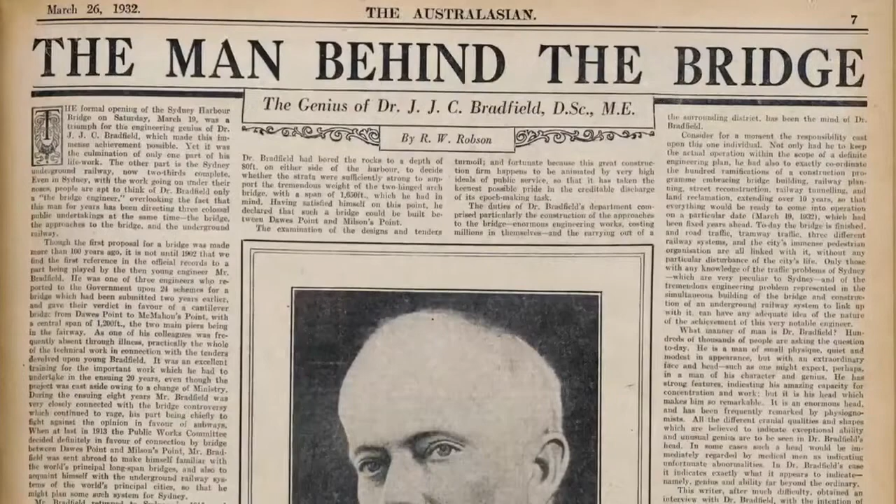Even during the final stages of construction, Bradfield was ever present. He appeared in all the official photographs and wrote articles for the public and engineering community. To the world, he was the designer of the Sydney Harbour Bridge.

Freeman wanted recognition of his own, so he wrote to Bradfield, pointing out that he'd been working on the design since 1921, and added, 'I ask you to use your influence as far as you can to prevent publication of the statement that the design of the bridge is yours.'

He went on further and demanded that it be known that the designs of the bridge submitted with Dorman Long's tender were prepared under my direction. A polite but strong request.

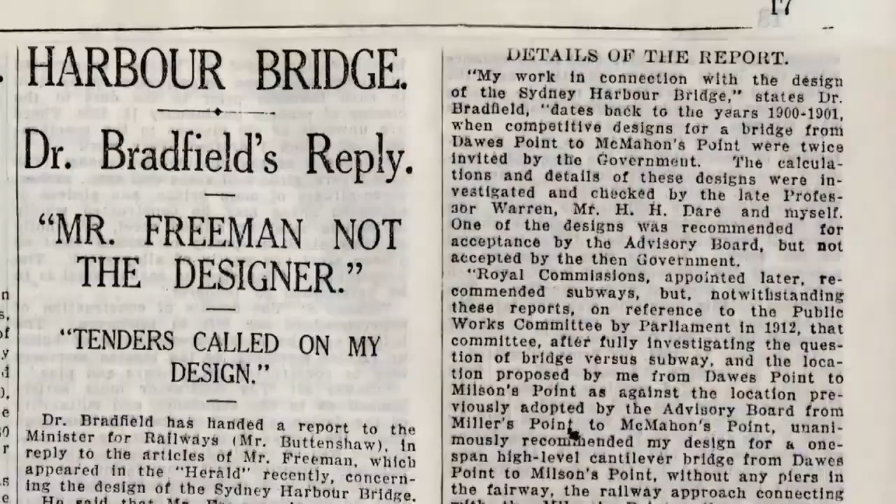Bradfield was unsympathetic. He replied, 'We're producing between us the steelwork of a structure of worldwide significance, the details of which are prepared by you, but are subject to my revision before approval.' He went on, 'Your request that I should proclaim that the design is yours would be incorrect if construed in any sense.' When Freeman sailed from England to Australia in 1929, he confronted Bradfield, who refused to back down.

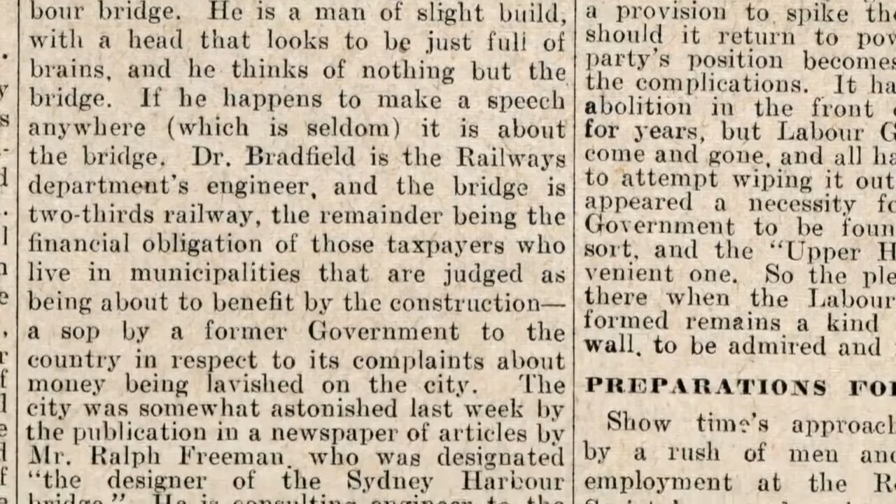An exasperated Freeman went to the papers. When the story broke in the Sydney Morning Herald, it was a scandal. Freeman's claims were astonishing. For years, Australians had celebrated Bradfield as the designer of their bridge. Now some unknown Englishman had come along trying to steal the glory, not just from a local hero, but from their country itself. Neither man would back down, both taking to the press to state their claims and attack each other. The argument became so heated, the Institution of Civil Engineers threatened them both with expulsion should the so-called newspaper controversies continue.

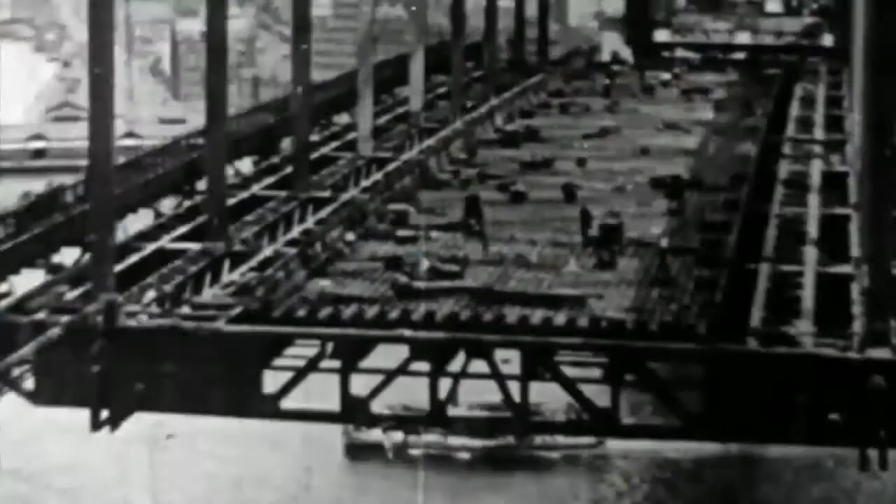As the argument raged, the workers on the ground got on with what really mattered, the actual building. When the arch was complete, the creeper cranes worked their way back down, constructing the roadway and other parts of the bridge from the centre out.

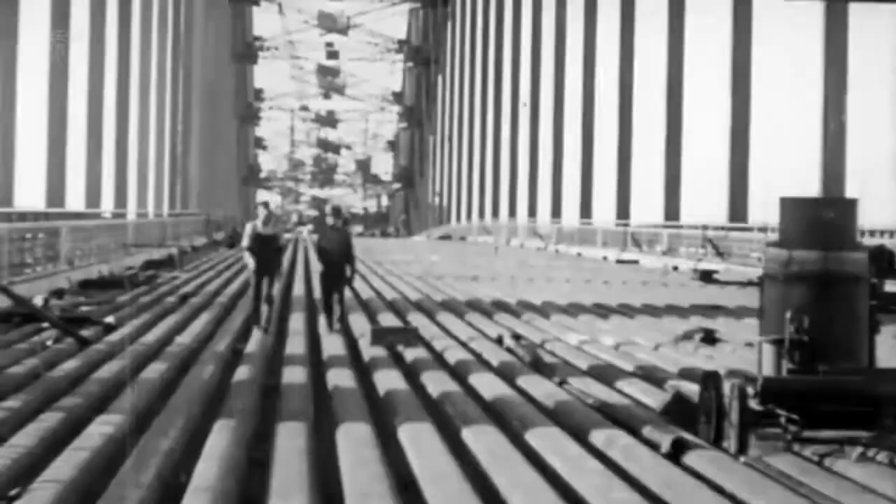Horizontal crossbeams were attached to vertical hangers which hung from the arch above. The deck for the roadway and railway, over 3,772 feet long, was built on top of the crossbeams, with the deck itself being completed by June 1931.

Rails for trains and trams were laid, and the road was surfaced using concrete topped with asphalt. Power and telephone lines and water, gas and drainage pipes were also all added to the bridge in 1931. On the 19th of January 1932, construction came to an end.

Three weeks of testing followed, including load testing using 96 steam engines positioned end to end. This bridge is so incredibly strong. Even if every roadway, every railway and footpath was completely rammed, you'd happily take it. It's been tested to withstand a 100-mile-an-hour hurricane and a temperature variation of 120 degrees.

In March 1932, it was finally ready for its grand opening. The dispute over who designed it rumbled on. In the end, a compromise was reached.